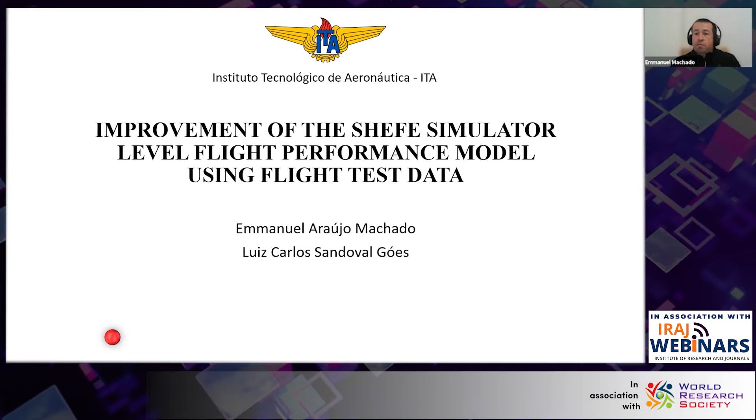We will follow this summary. We will make an introduction with the history of the project and the objective of this work. In the materials and methods sections, we will describe the methods and how data collection and flight tests were performed. In results and discussion, we will show the results obtained in the level flight power model, the graphics obtained with the engine parameters, and the positions of the flight controls through the entire flight. Finally, we will present the conclusions with the most significant contributions of this work.

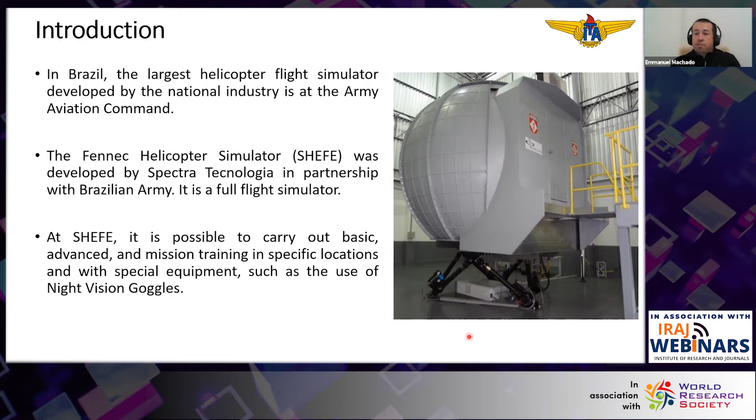Introduction. In Brazil, the largest helicopter flight simulator developed by the national industry is at the Army Aviation Command in Taubaté, São Paulo. The Fennec helicopter simulator SHEFE was developed by Spectra Tecnologia in partnership with the Brazilian Army. It's a full flight simulator. At SHEFE, it is possible to carry out basic, advanced, and mission training in specific locations and with special equipment, such as the use of night vision goggles. The simulator was built on top of a mobile platform, and inside the dome there is a replica of the flight deck of a Fennec helicopter and all embedded systems, visual and audio systems.

To better represent the behavior of an aircraft, a simulator needs to have mathematical models that reproduce its flight characteristics. The flight models included in SHEFE were developed by Cruz in 2009. This work aims to increase the flight envelope available in the simulator's flight calculation module to improve the fidelity of the currently existing model.

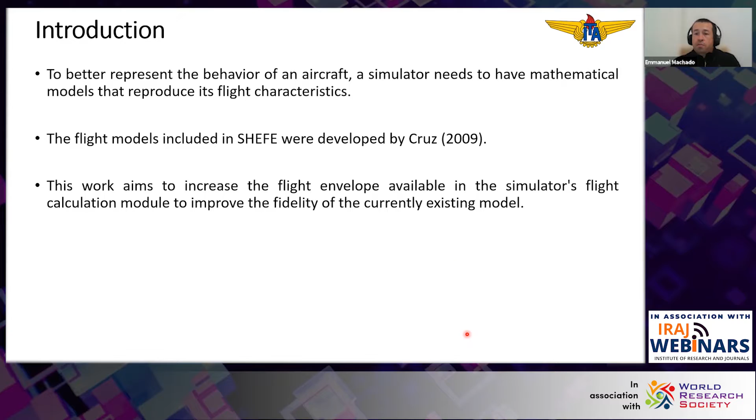Materials and methods. The knowledge of the power required for level flight of the helicopter in all its range of speed and weight is important to determining the performance characteristics of the aircraft model. The lift coefficient of the aircraft is proportional to the level of power needed for the flight, and it's a function of several unchanging physical parameters such as rotor disk area, gravity acceleration, air density at sea level, and rotor radius. The only parameters capable of being changed are mass as a function of fuel consumption and sigma,

which is the ratio between pressure and temperature. To determine the power parameters of this type of flight, the method of maintaining reduced mass for different forward flight speeds was used. Fuel consumption changes the total weight of the aircraft, and altitude adjustment is necessary to maintain the same reduced mass ratio and consequently the same lift coefficients. An integration of the level flight data with the hover flight data outside ground effect was performed, using the algorithm presented by Cruz in 2009. The algorithm calculates the reduction in induced power as a function of the decrease in induced speed by the main rotor with forward flight.

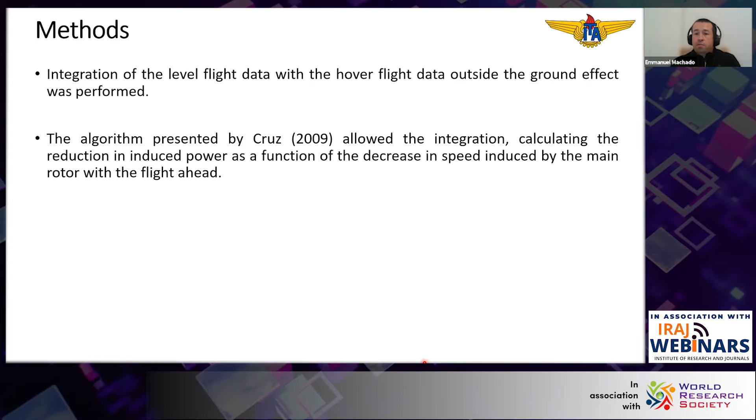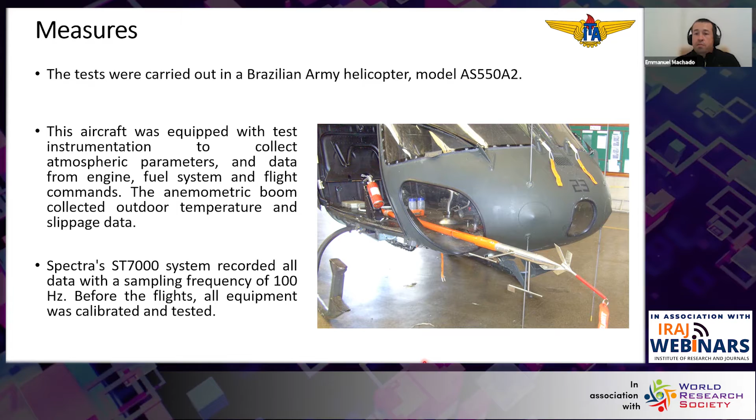Measures to collect the flight data needed for the analysis. The helicopter was instrumented. Parameters were collected like atmospheric, from the engine, fuel system, flight controls, and aircraft attitude angles. All data was stored by a Spectra recording system with a sampling frequency of 100 Hz. Before the flights, all equipment was tested and calibrated.

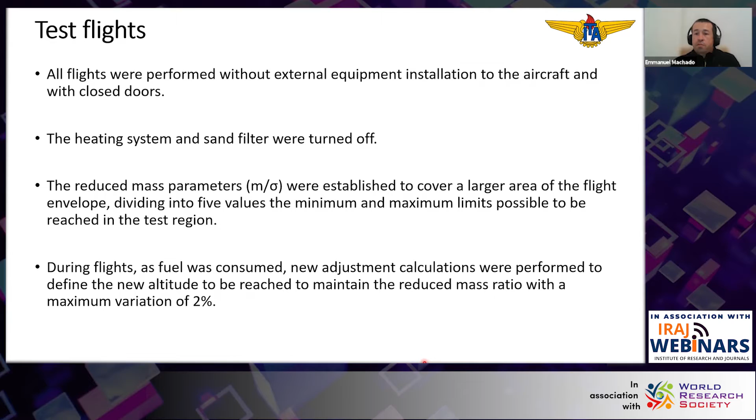Test flights. All flights were performed without external equipment installed on the aircraft, like ammunition, and with closed doors. This is in order not to modify the aerodynamic characteristics of the helicopter. The heating system and the sand filter were turned off so as not to consume power from the engine. The reduced mass parameters were established to cover a larger area of the flight envelope, divided into 5 values, the minimum and maximum limits possible to be reached in the test region. During flight, as fuel was consumed, new adjustment calculations were performed to define the new altitude to be reached to maintain the reduced mass ratio with a maximum variation of 2%.

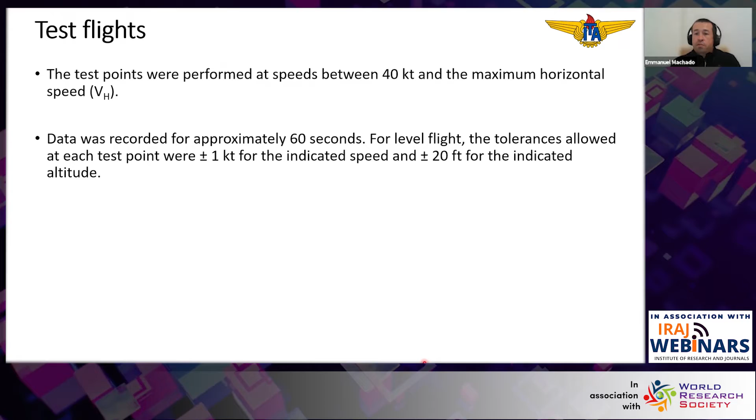The test points were performed at speeds between 40 knots and the maximum horizontal speed, VH. The 40 knot speed was determined to be the lowest possible speed for reliable reading on the aircraft speed indicator. VH was determined from level flight at maximum continuous power. Data was recorded for approximately 60 seconds. For level flight, the tolerances allowed at each test point were 1 knot for the indicated speed and 20 feet for the indicated altitude.

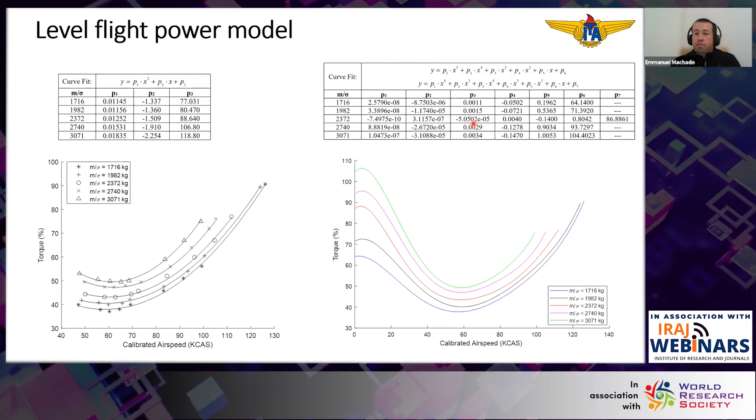Results and discussions. Here we can see in the graph on the left the data obtained in flight parameterized by the reduced mass. We have torque and velocity. The curves were fitted with second-degree equations using the least squares method. The curve parameters are described in the table above. Using the data from an outside ground effect hover flight test, together with the algorithm used by Cruz, it was possible to generate the complete level flight power model of the helicopter from 0 knots to VH. All the parameters of these curves are shown in the table above.

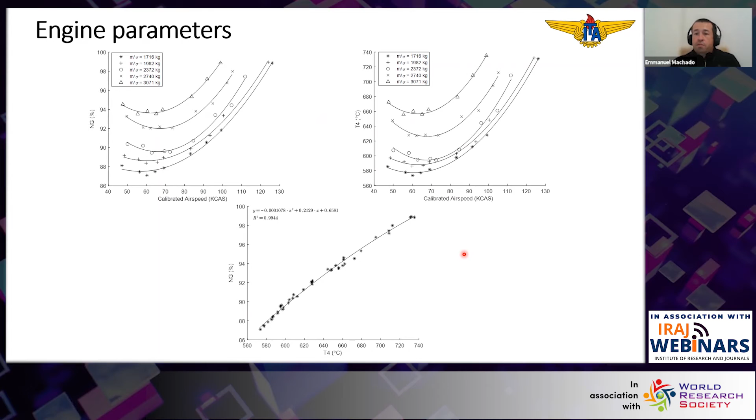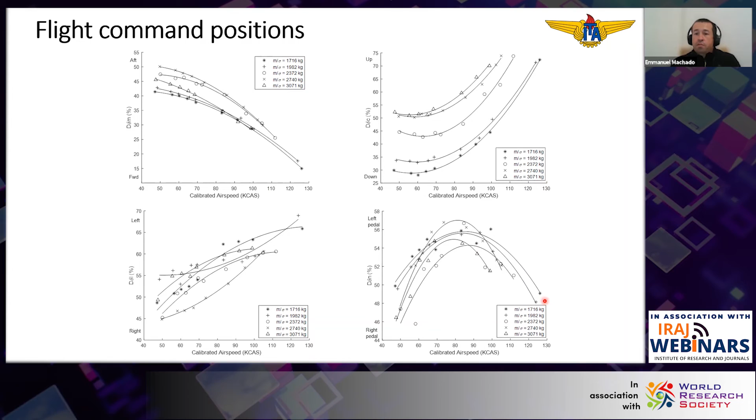The complete level flight characteristics of the Fennec aircraft were investigated and tested for implementation in the SHEFE helicopter simulator. The most significant contributions are taking advantage of all flight performance. A complete level flight model of the Fennec helicopter was developed to be implemented in the SHEFE simulator, including transmission and engine performance data and flight command positions. It was possible to insert hover flight data to complement the curves obtained in level test flights. Adopting the new mathematical model developed will better represent the simulated aircraft model, enabling more realistic training for the pilots. The characteristic level flight speed was determined for each associated curve.